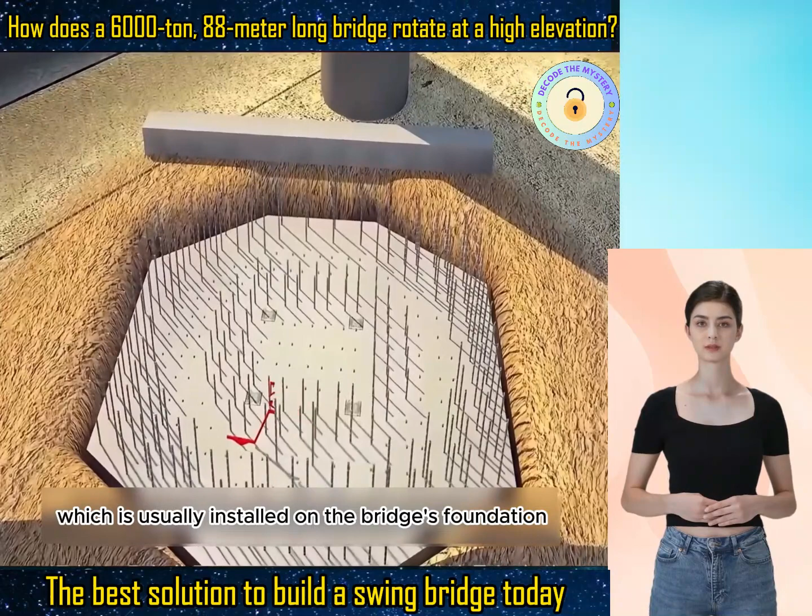How can a bridge weighing over 6,000 tons easily rotate over a length of 88 meters? Simply by using a device called this bridge hinge, which is usually installed on the bridge's foundation. Before installation, first determine the center position of the joint.

Then, place the lower frame of the bridge hinge in the center position. Next, adjust the vertical bars around the frame. Ensure the frame is in a horizontal state upon completion. Weld the remaining steel plates buried underneath.

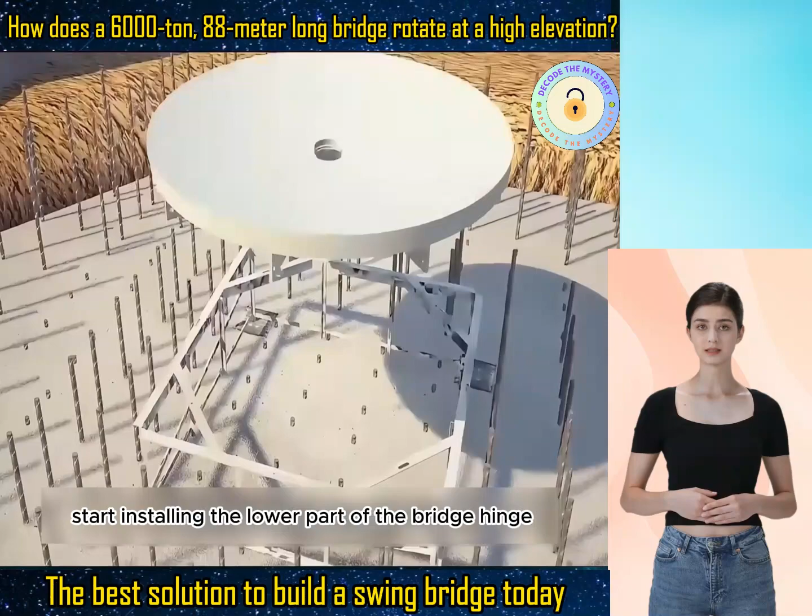Then, start installing the lower part of the bridge hinge. First, adjust it to the center position and ensure the horizontal deviation is less than 1 millimeter. Then, tighten the bolts to fix it and continue welding for reinforcement.

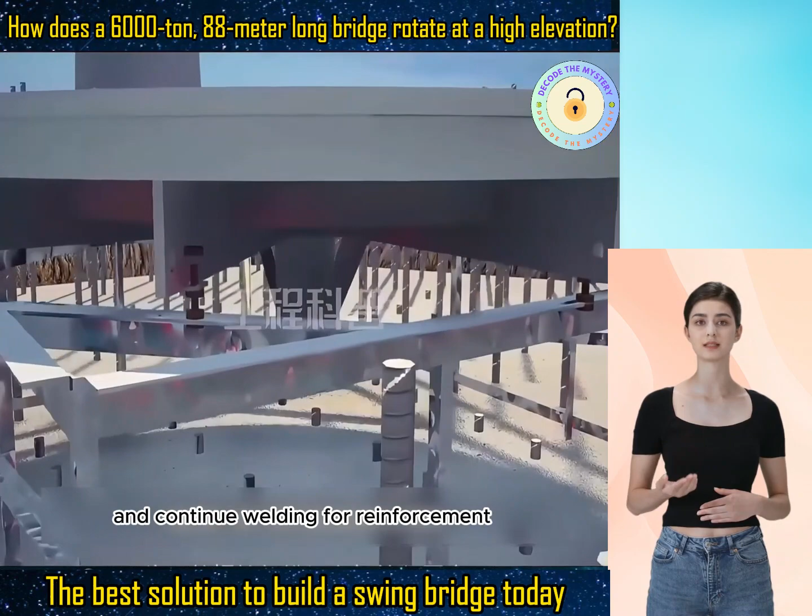The next step is to install the slide rail of this special bridge hinge. On the slide rail, there are air holes and a 10 cm vibrating damper. When placing, adjust the center position and the flatness. Ensure its center is aligned with the bridge hinge's center.

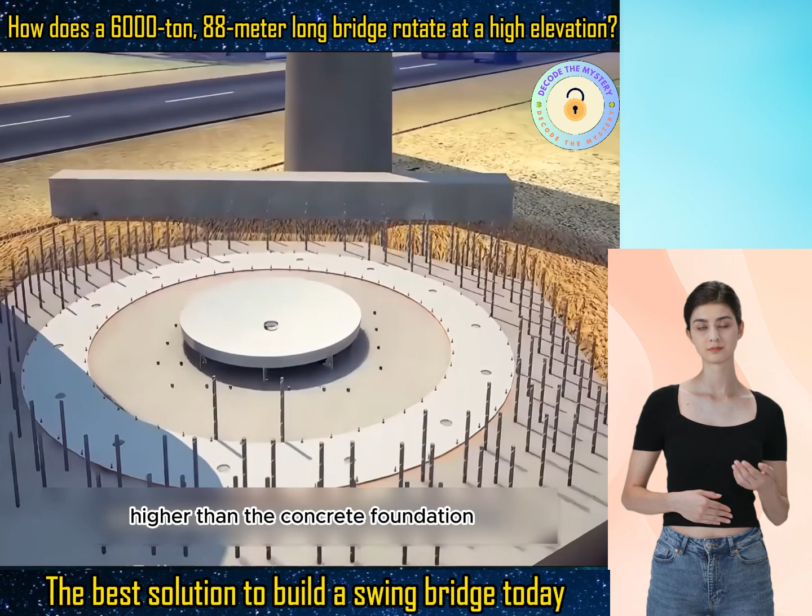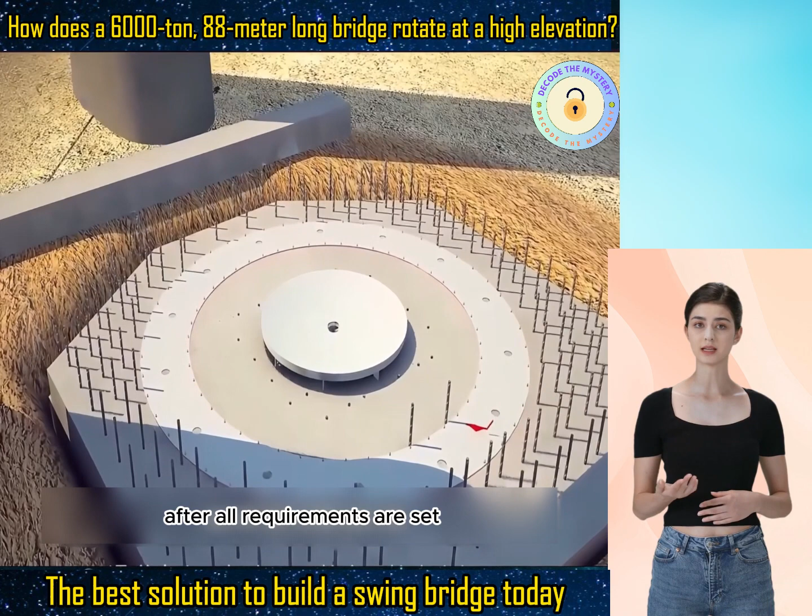And the slide rail surface should be 1 cm higher than the concrete foundation. The flatness requirement for the surface is also very high. The height deviation should not exceed plus or minus 0.5 millimeters. After all requirements are set, weld it with the rebar already embedded in the foundation.

The next step is to install the upper part of the bridge joint, cleaning the surface afterward. Then, insert the center shaft into the center tube, adjusting its verticality. Then, place the sliding plates according to the predetermined sequence on the lower bridge joint surface. Next, evenly apply high-quality lubricating grease.

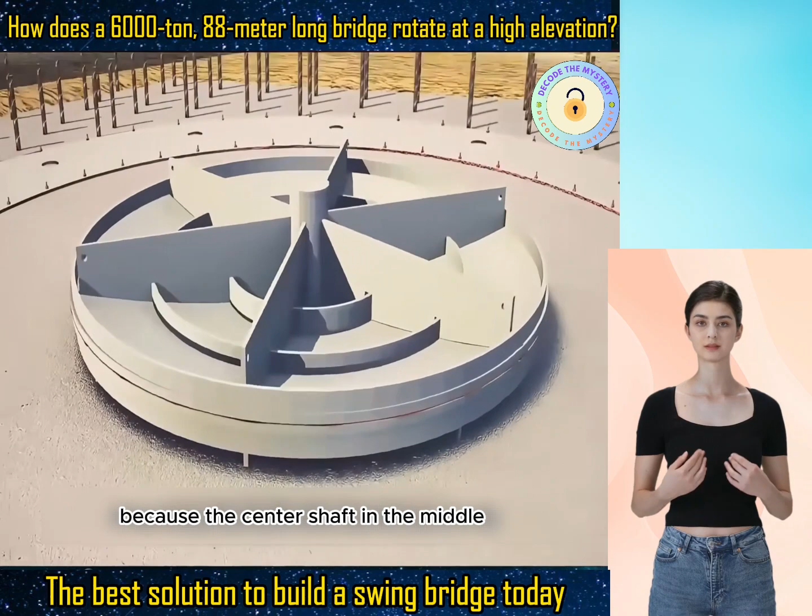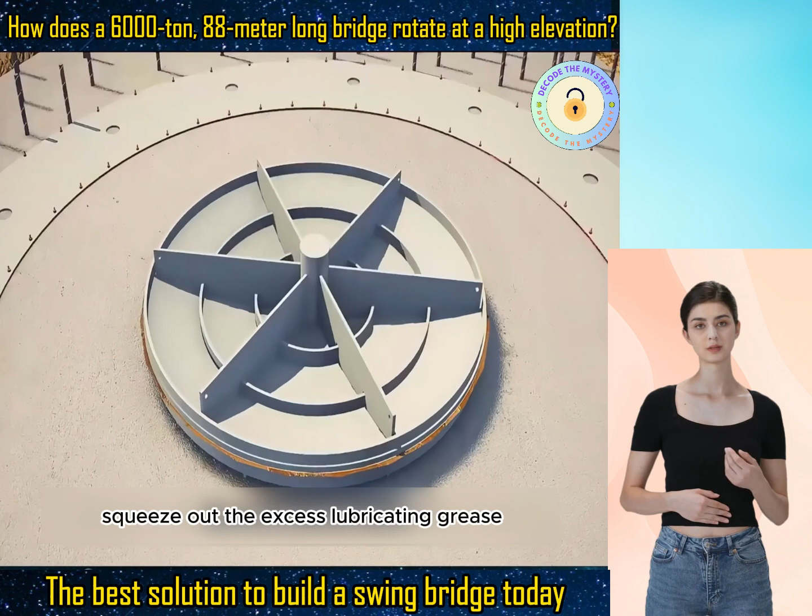Finally, install the upper part of the bridge joint. Because the center shaft in the middle needs to be removed later, it is necessary to equip a pull-up cable above. Gently rotate the bridge joint slightly to squeeze out the excess lubricating grease. Then, use adhesive tape to seal the gaps around, preventing dirt from entering.

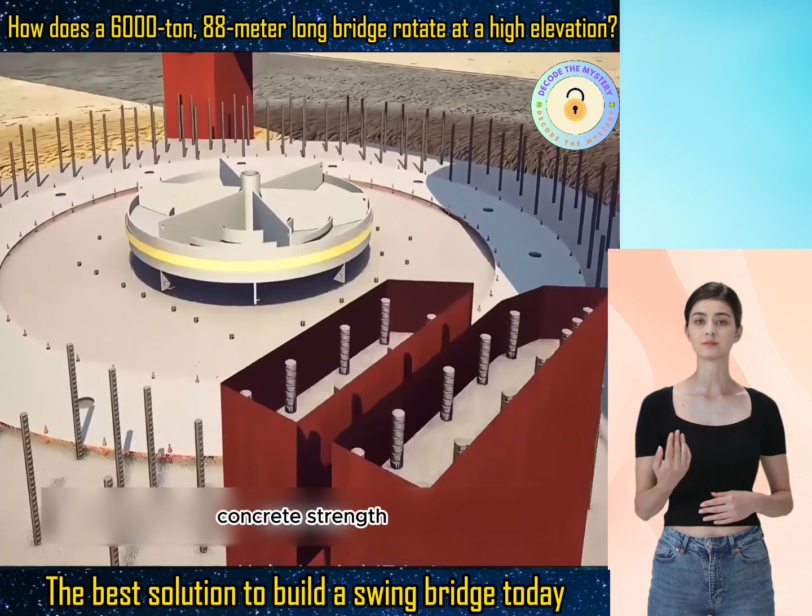Afterward, start tying the reinforcing steel for the structural foundation and pouring concrete. The next step is to install the drum legs and sandboxes, at a distance of 425 centimeters from the center. On average, install 6 groups with a diameter of 900 millimeters.

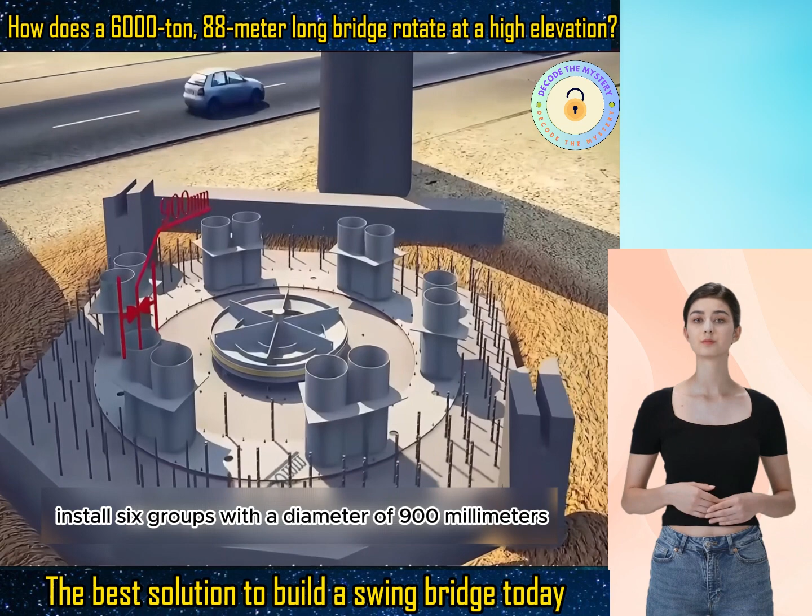The drum column is made of super durable steel tubes, with a diameter of 16 millimeters. The purpose is to prevent deviation during rotation, serving support and protection duties. And install an additional 2 groups of sandboxes between each drum column, used for temporary support before rotation.

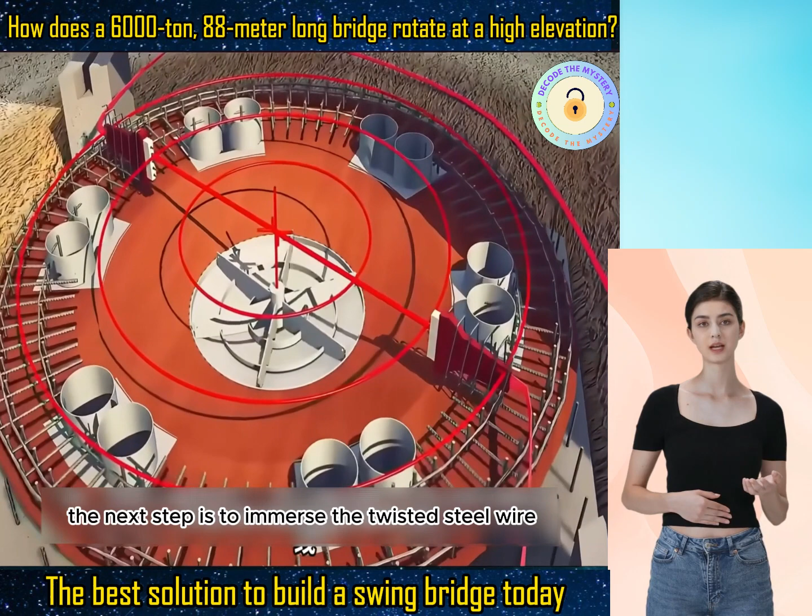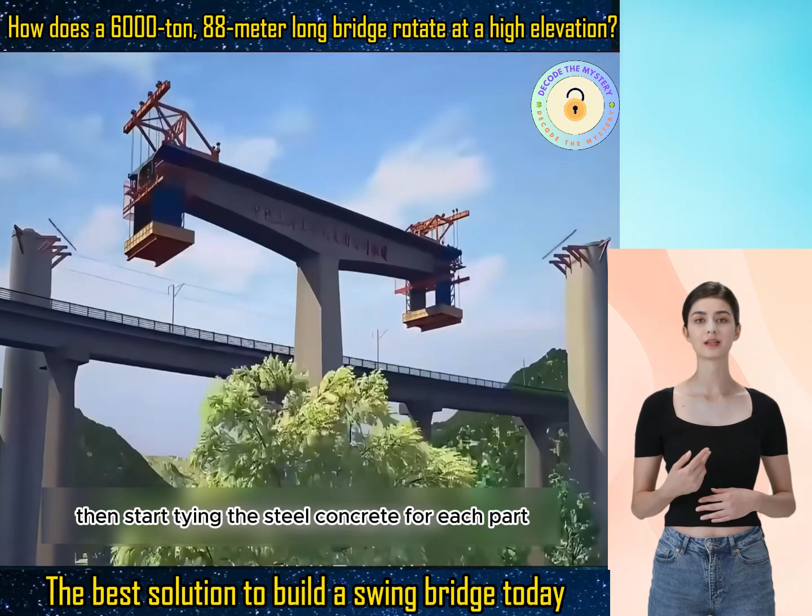The next step is to immerse the twisted steel wire through the center in this horizontal direction. The outer twisted steel wire is wound around the surface of the rotating disc. Then, start tying the steel and pouring concrete for each part, and gradually for the entire bridge.

After completing all, start rotating the bridge and unlocking all. Remove the temporary support sandboxes under the bridge. Tighten the twisted steel wire through the bridge shaft to prepare for work. First, perform a trial rotation and comprehensively check all systems for safety.

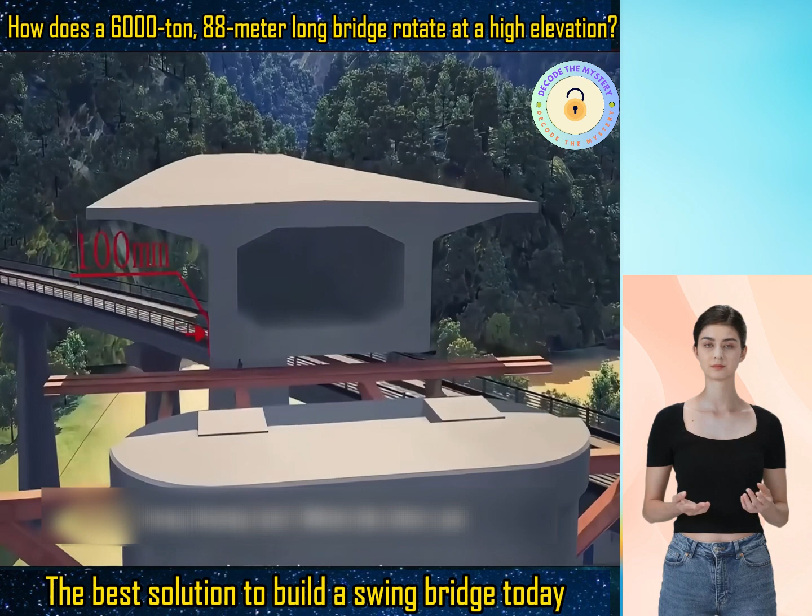Then, start the official rotation. Use the entire measuring device to observe the main axis. Within a distance of 100 millimeters to the end point, stop the operation of the crane. Use the method of small incremental movements to position gently.

After completion, install the end post. Immediately weld the lock of the lower part, ensuring no movement occurs. Then, seal and pour concrete in.